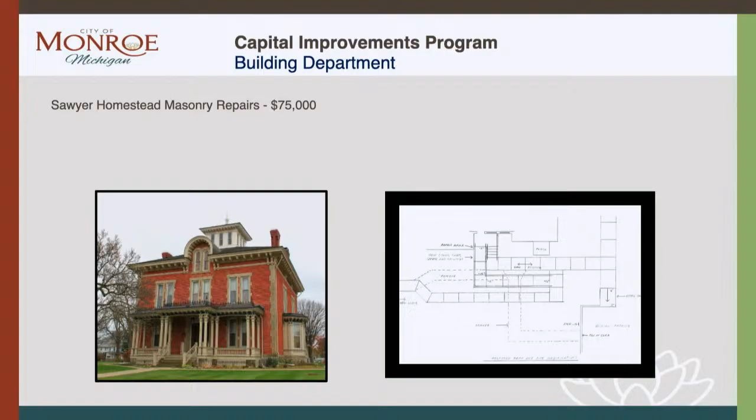That was it for the Building Division. So the next is the Department of Clerk Treasurer, and I know Clerk Treasurer Lavoie is here this evening.

Clerk Treasurer Lavoie submitted one item this year for consideration, and that's $119,000 to upgrade voter assist terminals and tabulators. There are several reasons for this, the most important being that the state of Michigan is going to require municipalities that host elections to upgrade their equipment by 2029. This is an effort to get ahead of those enhancements. These machines would be in compliance with the intended upgrades required for 2029.

I'm sure that Clerk Treasurer Lavoie will be happy to answer any questions if there are any from the Planning Commission.

Getting back into the rest of the Economic and Community Development Department, we will start with the Economic Development Division, and in particular on this one, the Downtown Development Authority.

One of the asks that we will have is for an upgrade to the downtown Monroe brick kiosk. There are a number of people who have looked to hang posters and things in the existing brick section, and we are looking to upgrade to an interchangeable electronic kiosk - very easy to update, also interactive for folks that are visiting. The company that we received a quote from installed one at the River Raisin National Battlefield Park, where you can go and interact with it currently. But this would be a first, and potentially looking at some other locations in the future.

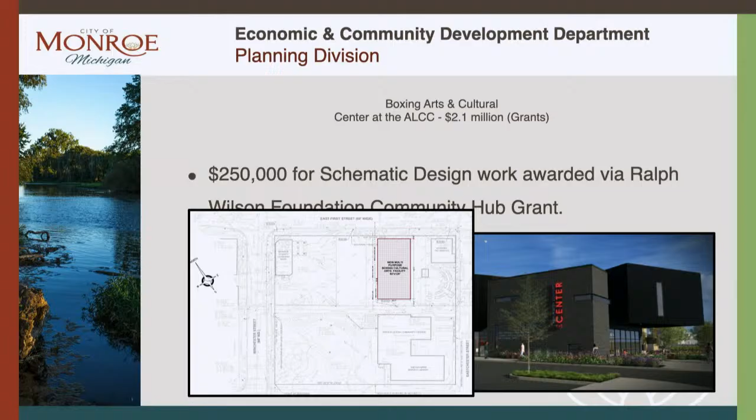Next is a project in partnership with the communications department, an update to the city's wayfinding signage. The goal will be to bring outdated signage into alignment with the updated parks and gateway signage that should be going in the early part of 2026.

We're proposing to fund this over the course of 2 years through the Major Street Fund, looking at key areas and doing a full analysis of where these signs are currently located, a full inventory, and seeing if we're missing locations or need additional upgrades, bringing everything into alignment with the updated city branding.

We talk about this all the time, but it's the small things like coordinating colors and branding and signage that go such a long way toward the community having pride in itself.

The next project is the funding of construction design documents for the Orchard Greenway Trail. This project has already been initiated through the 25-26 fiscal year, thanks to a regional planning grant provided by SEMCOG of $40,000, matched locally by $10,000 from the city. The total estimated project cost will be in the area of $2.5 million and will be a multi-year project involving property acquisition and construction.

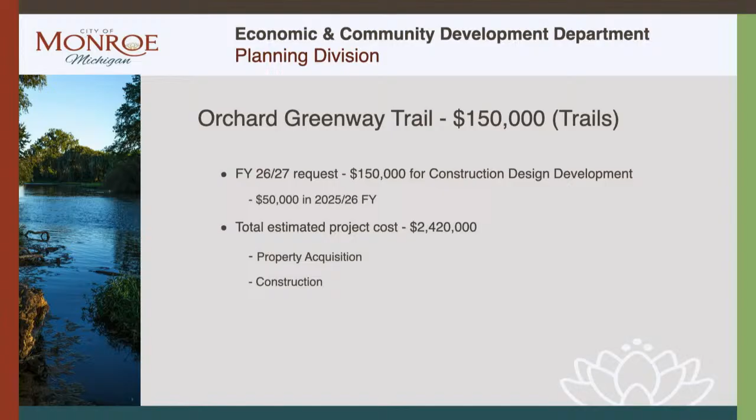Now kicking off the Parks and Recreation Division with the number one priority project for the department, which is phase 2 of the St. Mary's Park project. Planning to use the funding breakdown shown to complete phase 2, which will provide updated court surfaces, additional accessible trailways and viewing terraces, and an updated playscape facility.

This will go hand in hand with the parking lot upgrade that was just completed. You'll see landscaping starting to go in, if it's not already completed, at the park. There will also be some additional furniture included in some of those terraces. But that's all phase 1, and this would be phase 2 of the project.

We are in the final stages of waiting to hear back on a $400,000 grant from the DNR that would go a long way toward achieving the end goal of $1.6 million for the project. We would look to fund the rest through the remaining phase 1 and 2 grant from the MEDC, plus just over $1 million from the general fund and $200,000 from the roads and trails millage.

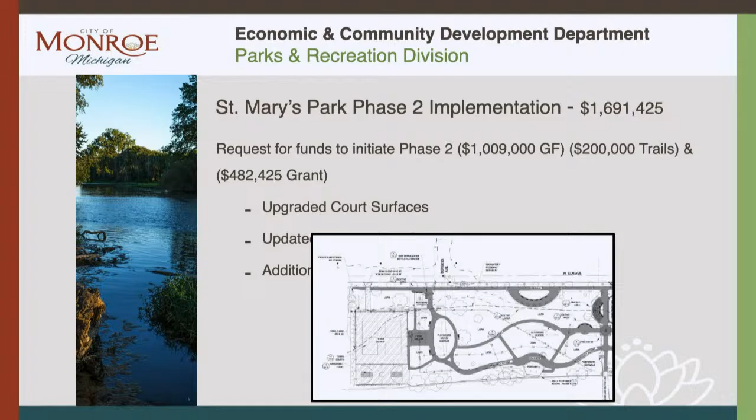A few additional park projects to highlight include an annual allocation to create an accessible pathway to the nature trails in Munson Park, and fund a much needed light repair to our Munson Park ball fields and diamonds.

In about 2016, there was a fix made to do almost a temporary patching of the court that's now starting to show its age, and it's going to warrant a full repair. So that's a $220,000 ask as part of the CIP. It's one of those critical needs that were identified.

To close out the Economic and Community Development Department, a couple of smaller projects. The first is an annual $10,000 set aside for parks and sidewalk maintenance. Last year there was a section in Soldiers and Sailors Park that we were able to utilize some of these funds for, after it was funded in the previous CIP year. Every once in a while there are smaller sidewalk sections that start to deteriorate, or may not even exist yet, but may represent a need for some of those things.

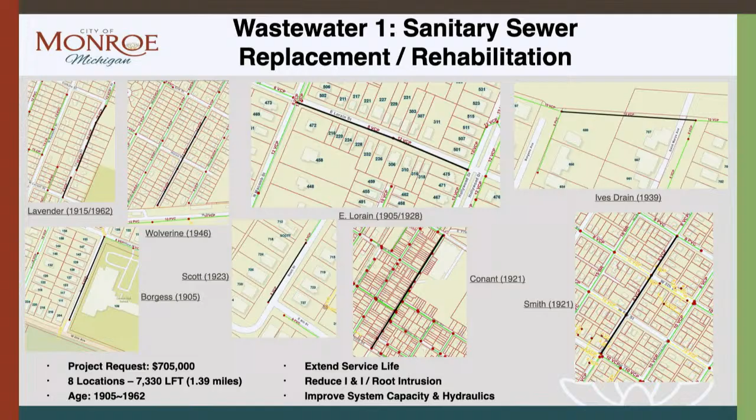Second ranked project is our backup level controller system at our settled waste system at the wastewater plant. This is a well that moves material from one treatment process to the next, with a system for controlling the level of fluid in there. When that goes down, it gets a little chaotic in emergencies, so we're proposing to have a backup controller system ready and available. That request is $100,000, and it'll help us with maintaining operation.

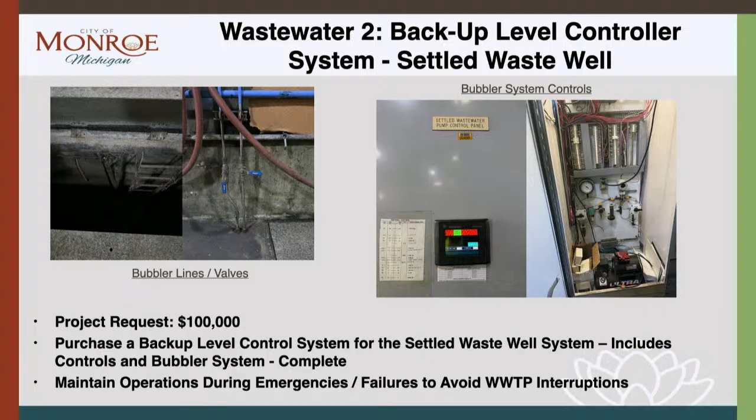Third ranked project is our wastewater lab upgrades. It's broken into 3 phases. The $195,000 breaks down as: we have an autoclave we have to replace that's used for sterilizing all the glassware we use every day. We have some antiquated cabinets and countertops we'd like to replace, and then construct a small partition to do more administrative work for our staff. The last phase is putting in a mini split to balance the heating and cooling in that area.

Now moving over to the water distribution division. The first project is our water distribution replacement, with 5 different projects located there, about 0.66 miles, about $1.329 million. The oldest is from 1912. These are again coordinated with road projects, and the main break metrics are listed there, but those records only go back to about 1983, so we know they're probably worse than that. There are 17 lead and galvanized lines that will be replaced in those areas. The Telegraph Road project, I believe they're supposed to be paving that next year, so we'd like to get that replaced before that. We've had several main breaks in that area.

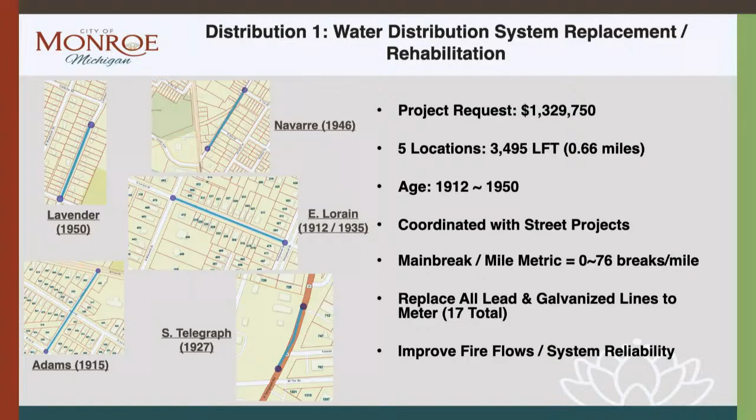The second ranked water distribution division project is the meter shop improvements. It's broken into 2 phases. The roof replacements for the meter shop and equipment building are flat roofs with about a 20-year life. We're starting to have some leaks and we'd like to replace those. That was constructed in the 2006 addition and rehab at that facility.

The other improvements are geared towards this inventory barn. We've got about $2 million of inventory in there, so we'd like to maintain it. It definitely needs some rehab on the exterior, and some concrete floor repairs and drainage.

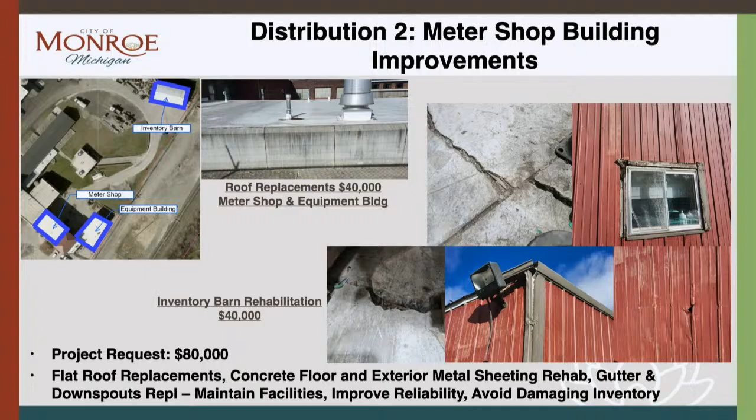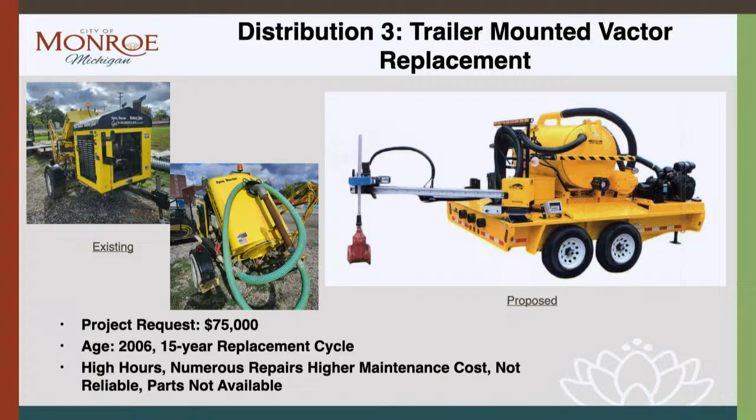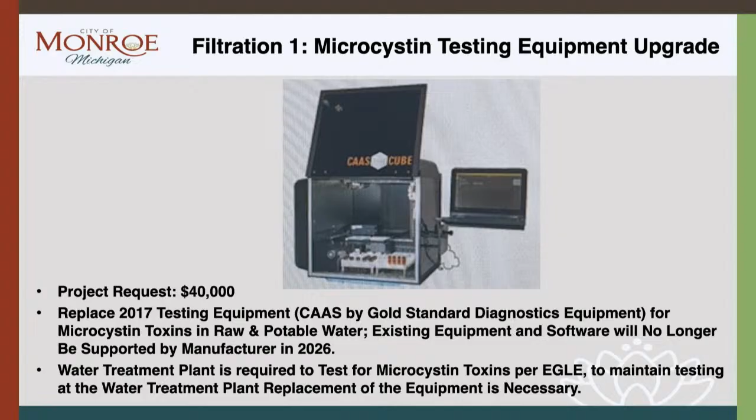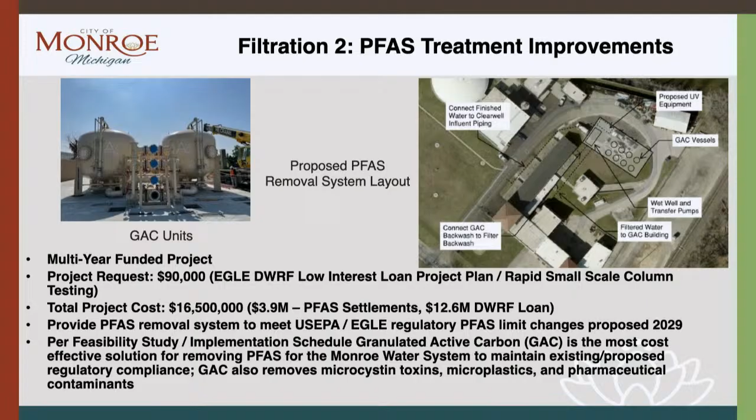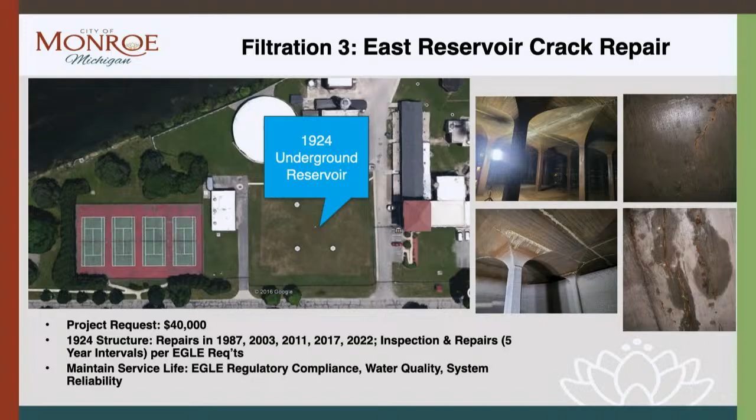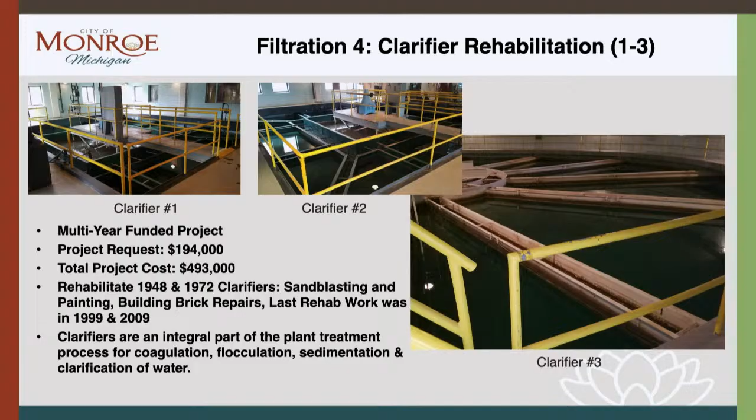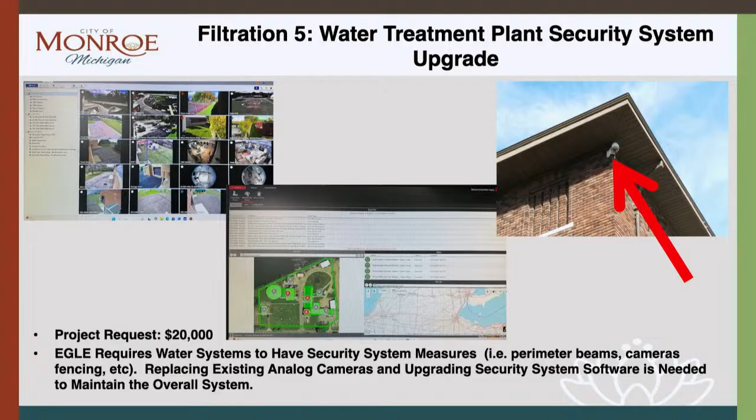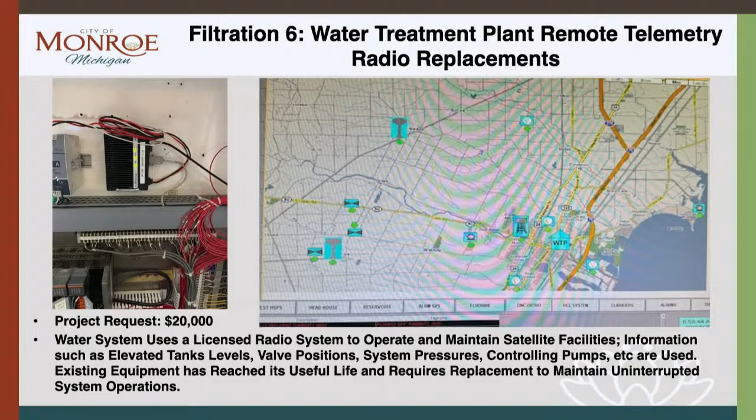The seventh ranked project is a pump motor drive rehabilitation project, a multi-year funded project. The request is to help contribute funds to continue replacing - we have to pull these pumps out of service, inspect them, and have them evaluated. It can literally take over a year to get them back from the vendor and installed, so it takes a long time and a lot of funds to complete this process. But maintaining the facility's integrity to transfer water is paramount, so this is geared towards the high service pumps at the water plant.

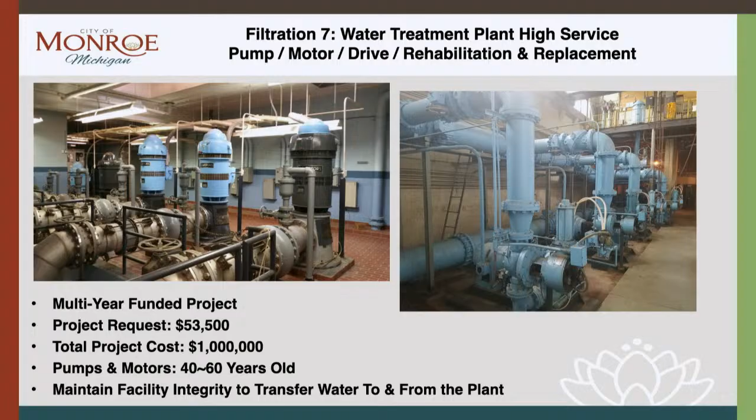The next ranked project is our main power system rehabilitation and replacement at the water plant. It's a multi-year funded project geared towards addressing system maintenance, repairs, and replacement of breakers, transformers, and the switchgear of the main power coming into the plant. So this will be seed money towards starting that process.

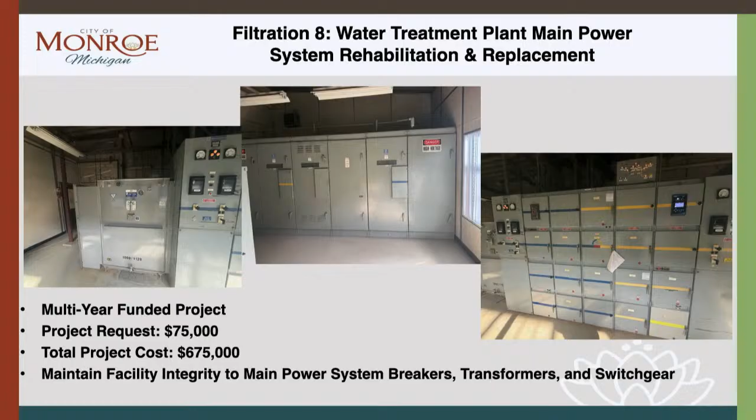And the last ranked project in the filtration division is our filter rehabilitation for all the filters, there's 12 of them. Different years that they were all built: 1924 with the original plant, 1948, and 72. This is a multi-year funded project that will address concrete work on the outside, roofs, some regulatory improvements that were outlined in a study we had to complete, and media replacement.

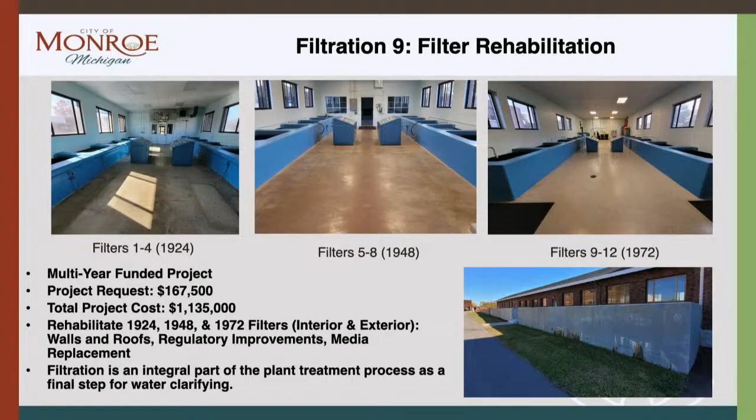Now moving over to the raw water partnership. The first ranked project is a roof replacement. This $25,000 request will be added to last year's request to do one large project to replace these roof systems that last about 15 years. It's a flat roof, these are all flat roofs. So this would just be replacing the roof systems that are there to maintain system reliability, avoid leaks on the equipment and things. The funding is per our agreement with Frenchtown, based on capacity. It's about 69% city and the balance is with Frenchtown.

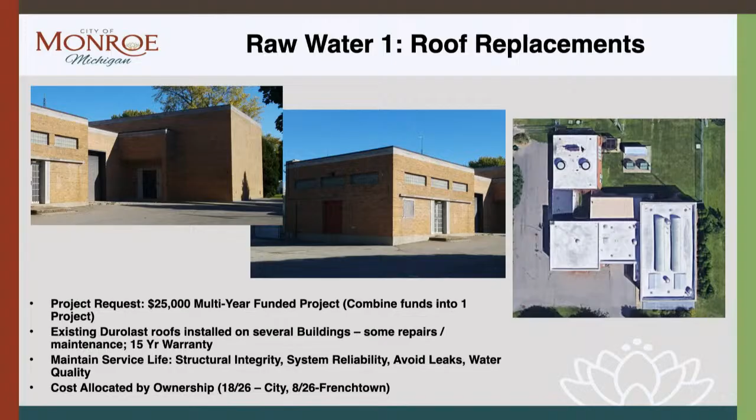Next slide. The second ranked project is the pump rehab, motor and drive for these low service pumps. These draw water from the 4 onshore wet wells and pump it to both the city water plant and Frenchtown's water plant. It's a multi-year funded project, and some of these components are 30 to 80 years old. So rehabilitating these every 20 to 30 years is mandatory. The whole goal is to maintain the integrity of the facility, and the costs are still based on ownership percentage.

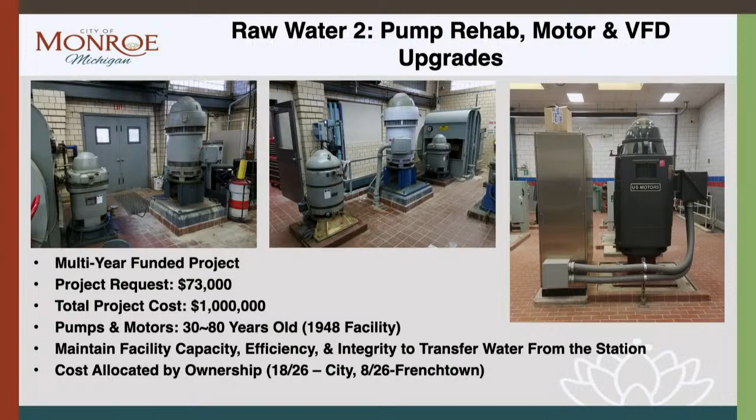Third ranked project is replacing our chemical feed line. There's 2 intakes, a 42 and a 30. Inside those, there's a 2-inch line that runs all the way out to the intake structures, 6,000 feet offshore, and the other one's about 2,000 feet. These need to be replaced every 20 years or so. These feed chemicals to help remove invasive species that build up and can clog our intakes. We experienced that in 1989, in which we had no water coming in. So this is mandatory to help us with maintaining water coming into these facilities. Cost is the same by percentage for the city and Frenchtown.

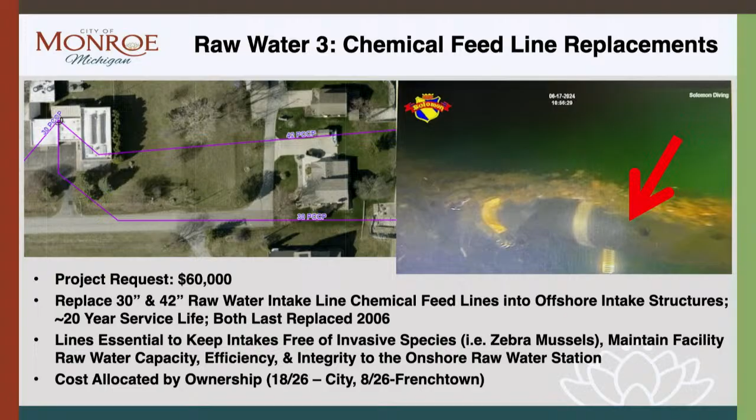And the last ranked project is the addition of the raw water pump. This is a multi-year funded project, you've probably seen this on here before. The whole goal of this project is to add a second large pump that would be in the newer facility, the newer portion of the facility. There's 4 wet wells, we have pumps in 3 of them. This would be put into the last one, and it would help contribute to maintaining our firm capacity of 18 million gallons a day. So, and that is it.

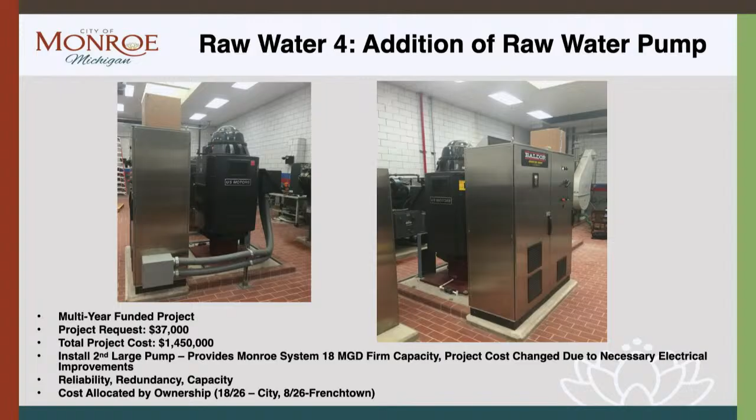Good evening, Planning Commissioners and City Council members and others in the audience. Patrick Lewis, Director of Engineering and Public Services.

So we do have 10 different streets funded this year, about $3.9 million for this year's CIP. 8 of those are what I'd call bona fide streets, and 2 of them are either the design for Greenwood or the mast arm upgrade project.

So you've heard the spiel before, those of you that have been around. The way we look at streets is that the superintendent of public services, the assistant city engineer, and I drive every block of street every year in August and September. We give it a subjective rating, 0 through 10 on the street surface, 0 through 4 on the curb conditions, add a point for a major street, and then we combine those into similar blocks. And that's how we start to look at the list.

We start to sort those when they get to about a 7 rating, and start to consider those for funding. There's a variety of factors why they rise to the top—it's not always going to be the largest number, but we'll get into that in a minute. Some of the other things we look at, which aren't too surprising, it's not always worst first.

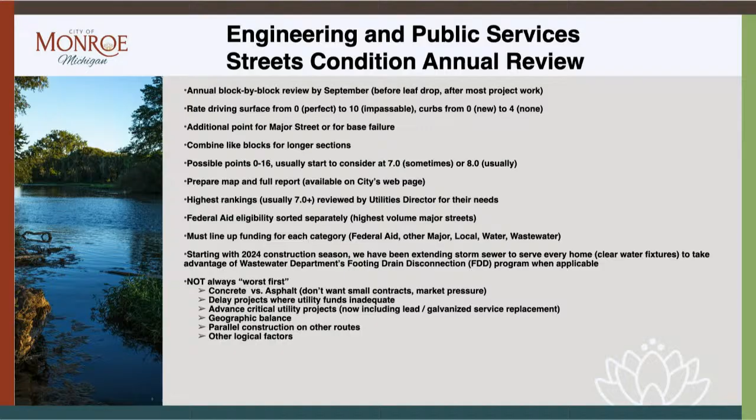Our first priority was Lavender Street reconstruction. I made it our first priority because we had delayed it a year from where it should have been, just because we were working on Rosler Street last year, one block over. This is an asphalt road done in 1996 last. The curbs were in somewhat decent shape, but once we started costing it out, we realized it was going to cost more money to try to save some of the curbs and work around them than to just tear it all out.

So this will be a full curb replacement project, and we're going to do this in 8-inch concrete. We do have a new storm sewer down the middle of the road because there is none, and in that neighborhood we have quite a few sump pumps connected to the sanitary. So that deals with Barry's corrective action plan, which requires us to remove those clear water discharges - that's a focus area of what they call the CAP plan. We're replacing the water main in this location as well, so we're going to combine that in one bid package with water mains and streets here. So you can go on to the next one.

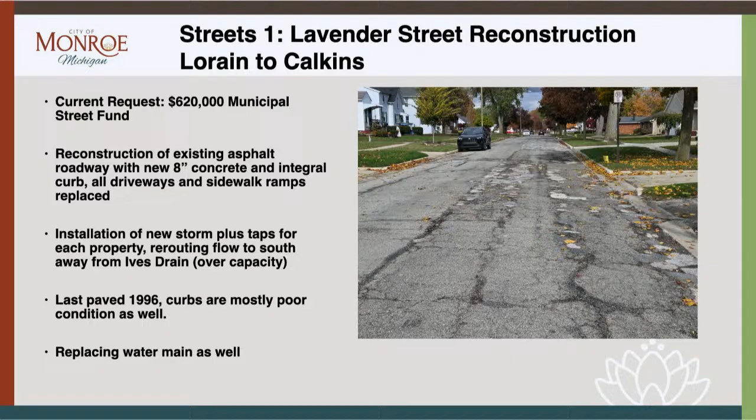Navarre Street is our second priority, and we held this one a year, partly because we're looking at this year's federal project in 2026, which we already allocated funds for last year, the Jones Avenue reconstruction and realignment project. We got a $646,000 TAP grant to add bike lanes and sidewalks, which actually covered the cost of the curbs too. Because the Jones Avenue project will realign things so LaPlaisance coming from the south automatically curves into Jones and the north leg is teed off, that will keep truck traffic from going all the way into town. Because of that realignment, Navarre Street will be affected a little bit, so we held it until this year even though it would have made the cut last year.

This request is $540,000 from the Municipal Street Fund, and this is a concrete roadway - it will be replaced in concrete. We're replacing the water main here as well. Fortunately we already have a storm sewer here, so we just need to put the leads into the adjacent homes. The trick here is going to be working around the sidewalks - we have a very narrow right-of-way, so that sidewalk is right at the back of curb. When built, those ramps going down to the driveways didn't always meet the ADA cross slope, so we're trying to focus on putting one accessible path down there.

It might involve crossing the road a couple of times where we don't have as many driveways, so this is a bit of a design challenge, but we are looking to do this year. If the Jones Avenue project bids this year but won't be done until 2027, we'll probably delay this too, but we want to fund it this year and get it designed.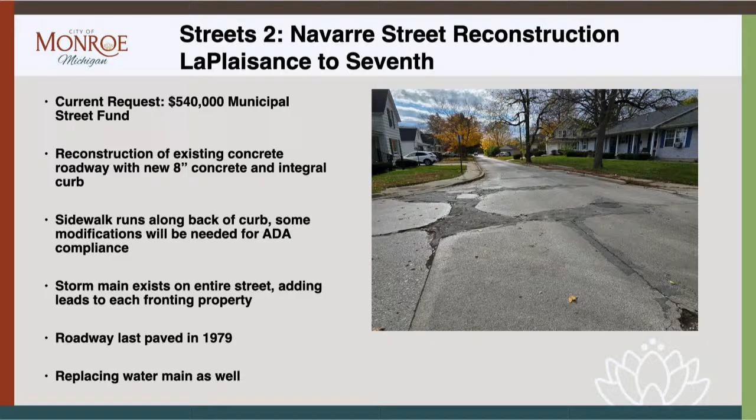So we are replacing the water main in this location also. You can go to the next one. Our third priority project, where we are not replacing the water main because that was done in the 90s, is Michigan Avenue from Mason Run Drain to Greenwood. It's another project with an asphalt surface.

We looked at this to try to save the curbs. I had a couple of job shadowers come with me on this one, and I was impressed by their ability to perceive. We all marked the curbs and identified what percentage we'd have come out, and a couple of high school sophomores came up with the same answer I did, which was pretty cool. When we looked at this, we found about 50% of curbs needed to come out. It's less efficient to leave in some curbs and try to keep them than to just tear it all out, because the contractor can move a lot quicker that way.

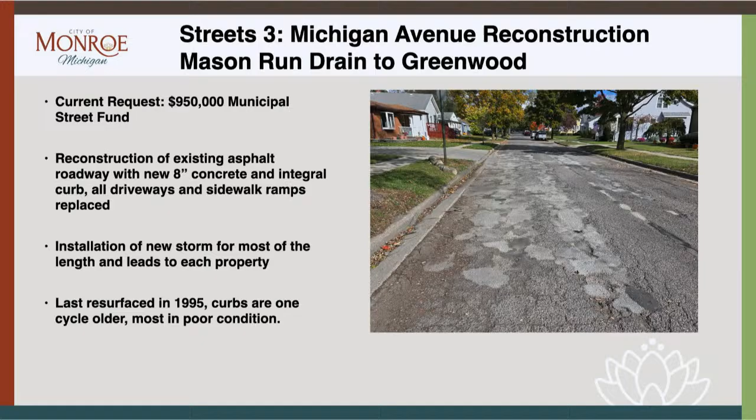There is some storm sewer in this area, not complete, so we're filling in the gaps and adding leads to each of the properties. This is a pretty long project, almost half a mile, but with all the storm sewers and leads involved, you're talking about a $950,000 expense. We are surveying from Greenwood going north to do in 2027 - that'll be a water project - but for this section from Mason Run to Greenwood, it'll just be street and storm sewer.

Project number 4 is another synergistic project to some degree. We picked this block because we're working on the loop trail extension - we'll come up with a better name for it - extending the loop trail from 5th and Rosler all the way through the Bechtrom Foods property up to Front Street. But we're crossing Adams, and we don't want the new trail crossing a road that looks like this, so we moved this up a year.

This probably would have waited another year or two, but we are reconstructing both the block between 3rd and 4th, which is currently concrete, and the block between 3rd and Front, which is asphalt. We're doing both in concrete as well, and we have water main to replace on both. A little bit of storm sewer, some at the corners. Between the two blocks it'll be a $360,000 expense, and as you can see, the last resurfacing or reconstruction on these was in the 1960s, so we're not redoing new roads here.

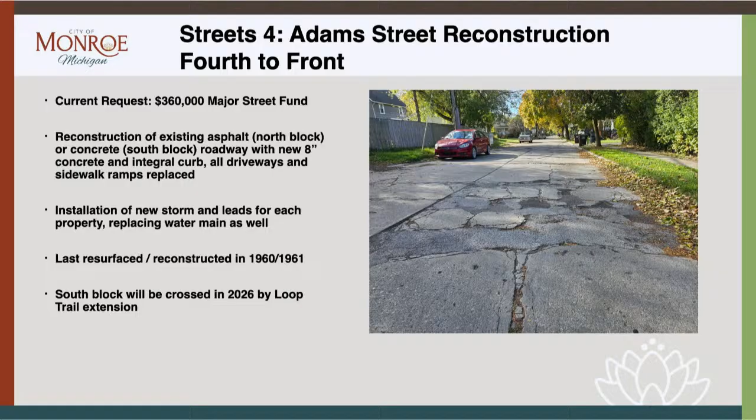Project number 5 - I mentioned there was one where the tail's wagging the dog, if you will. This is it: Barry has had a ton of main breaks on this section, East Lorain Street between Macomb and Hollywood. This is the worst part of the road. Most of the road is in serviceable condition, although it's 40 years old, but we can't wait any longer on the water main replacement. We've replaced the same person's drive approach at least 4 times, twice this year - that gives you an idea of how bad it is.

So this is one where we're moving up the street to meet the most appropriate timeline. But this is another instance where we have no storm sewer on the entire block, so for 800 feet we need to install a storm run and some taps. But this is one where we can get away with just milling and resurfacing, without taking all the curbs out. So the cost on this one is a little less, $350,000.

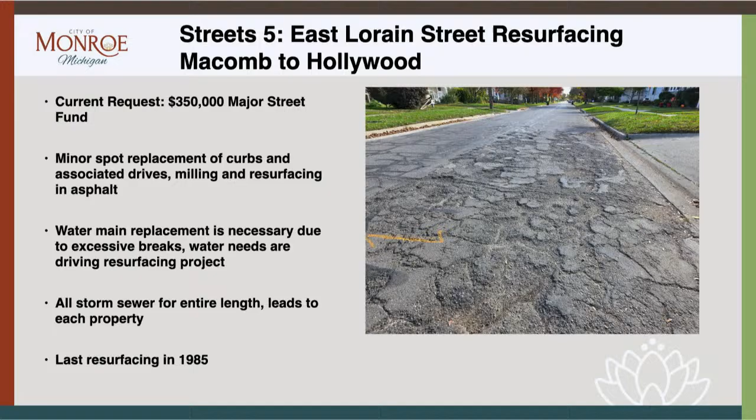Project number 6 is our Fredericks Drive, and 6 and 7 are both what I'd call big patch projects. Fredericks looks a lot like this, from Donnalee all the way to Telegraph - you've got pieces where it's just brutally bad, and then you've got some good panels in between.

So we're going to be doing about a third of the panels here in that stretch, but it's going to resemble a full reconstruction when it's done, in that it's going to be in pretty good shape. It was constructed in the 80s and really hasn't had anything done since, so it's in pretty good shape other than fixing those patches. We're going to do a short section of Crest Lane while we're at it as well.

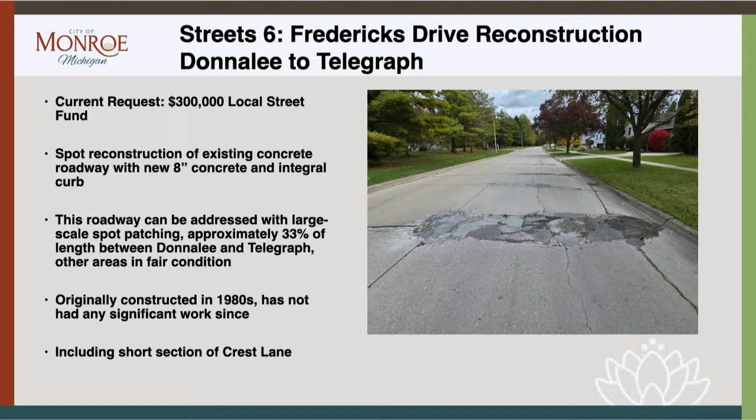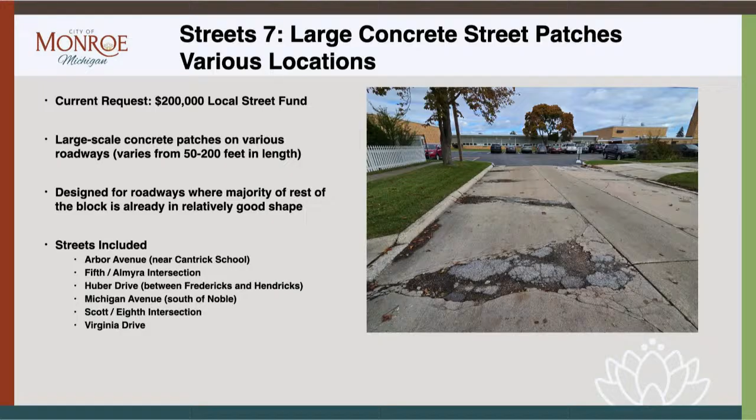I mentioned some spot patches. We're trying to go through our inventory and say, where can we do $20,000 to $50,000 worth of work and make the rest of that street in really good shape for the next 10 to 20 years? So we picked a number of locations. We did this last year, we think it worked out really well, so we're going to do another run of these. We've got 6 locations. The largest of those is in view here, and that's the block of Arbor between Maywood and Cantrick School.

Streets number 8 is one that we're kind of stuck in a holding pattern on to some degree, but we had to deal with it now. I think I've mentioned in past years, we're looking at a comprehensive storm sewer project in what's affectionately known as the W Street neighborhood, which everyone knows was built in the 50s. Eaton Tile is drastically undersized. It is a county drain, and we're going through the process right now of looking at options, with the Spicer Group assisting us with that. We're getting close to having the final report in, but we're at least 2 to 3 years away from construction of that large diameter tile and whatever system we put into place, and that'll be an expensive project done through the Drain Commissioner's office.

However, Wolverine Avenue is a complete mess. The north block looks like this, it's in very poor condition. We can't allow this to continue too much longer, so we have funded what I'm calling a temporary resurfacing. There may be elements that are quasi-permanent. The very north end, we may have to put down a concrete pavement for 100 to 150 feet just because it's gotten so bad. But we're looking at doing no curbs, no drive approaches, 1.5 inch mill and fill, and just hold it in place for hopefully between 5 and however many years we can get that project done. So we don't generally like to spend good money after bad, but we can't wait any longer. So that's what that is.

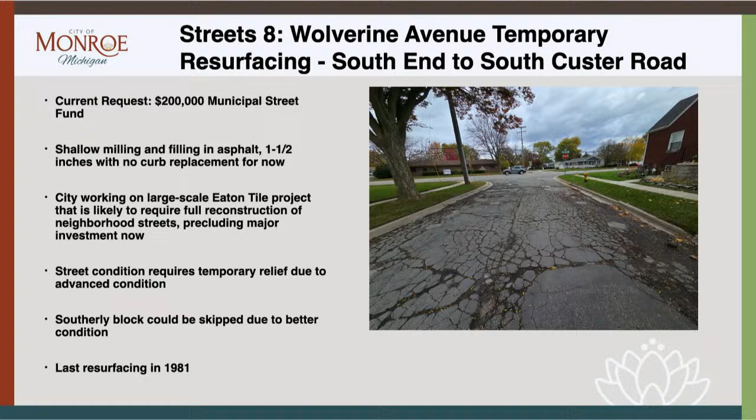Streets number 9 is something the council sort of already committed to because we were asked to from MDOT. We've been partnering with them as they've been upgrading their traffic signals along their trunk lines to meet the Telegraph Road corridor study, which calls for a higher aesthetic standard. We're getting close to having all the telegraph signals done with this. You've already seen these at South Custer and Telegraph, and at 7th and Telegraph. And then we did the work ourselves as part of the La-Z-Boy project to do the same thing at Holiday and Telegraph. So they're looking at Lorain and Telegraph this year, and M125 Monroe Street and Noble. Elm Monroe also has the mast arm treatment on it. So they've asked us to pay the upgrade costs.

Originally, a few years ago, pre-COVID inflation, they were looking at about $80,000 per intersection. Now we're about double that. I think the quote was $286,000. I've requested $300 here to cover the time frame between now and when they actually get ready to do it. So that's consistent, we like it, we love the look, it's safer. They're on the far side of the intersection, so we don't have to worry about signal knockdowns. These poles are pretty robust.

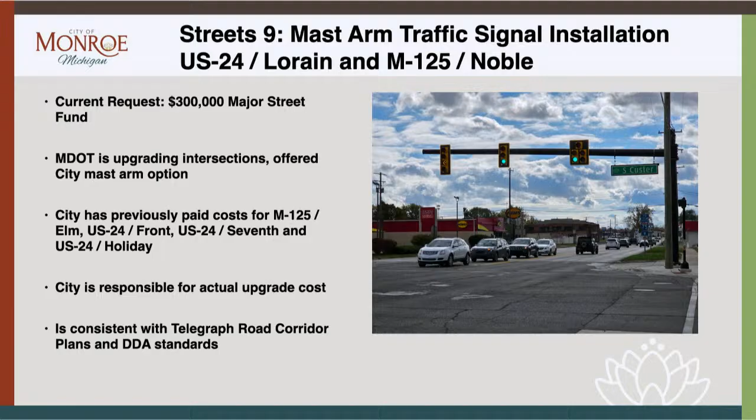And project number 10 is one that I've kind of had in the back of my mind for quite a while here. Actually, we started looking at this part of this project close to 20 years ago, and that is a reconstruction of Greenwood, which is starting to get in poor enough condition that we need to look at it. But more importantly, I'll say a reimagining of this corridor. Greenwood Avenue was designed, if you can believe it, back in the 50s. The reason it's 36 feet wide is actually identified as part of a potential I-75 business route. When they built the expressway, they were looking to connect a business loop there, and this was one of the streets that they looked at. It was built overly wide.

It dead ends west of Hollywood, and east of Michigan into the Greenwood townhomes. But it is something that could very easily be extended to the east for future housing development. So we wanted to take a look at this.

Going west, the city actually owns the property all the way to Macomb Street. It could be extended to provide a better route into that neighborhood. Right now, everyone uses Orchard, Oakwood, and Maywood, but they're quite a ways apart.

We could also narrow this road up. So when it comes time to reconstruct it, 36 feet is too wide. There's no homes that front just Greenwood, they front all the north-south streets. You could probably get away with a 28-foot corridor here, using the rest of that for a non-motorized pathway along the drain.

So we would like to request $100,000 in funding for the design of not only the extension to Macomb Street, but to reinvent this corridor, and then probably do the work in 2027.

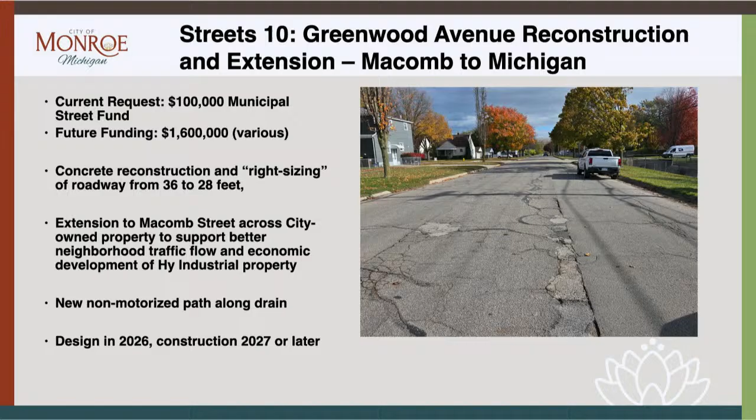So I'm pretty excited about this one. It's our number 10 priority only because it's not construction this year, but I'm really excited about this one. Okay, on to infrastructure.

I'll keep it shorter on the infrastructure ones. Our number one was our sidewalk replacement program. This is pretty routine, you know what we do on this one.

I will say our complaints are getting higher and higher every year, and some of that is because with the passage of the streets and trails millage, the city's now paying all the costs. We used to assess the general deterioration to the property owner. So it turns into a situation where before, when the residents were paying, they were arguing that it wasn't an inch. Now that the city's paying, they're arguing the other way.

So we're actually seeing the cost go up, and that's good because it means we're identifying more hazards. But to get just the program area done is about 150, and we're dealing with 100 to 150 just in complaints. So we've upped that cost from $250,000 to $300,000 this year. And this year's target area would be north of the river and east of Maple.

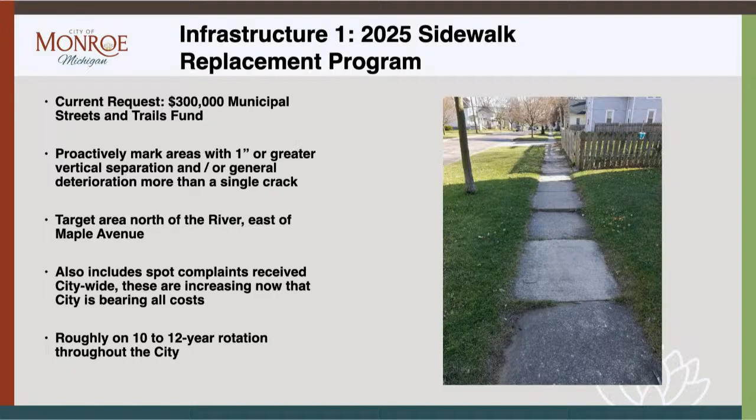So, go on to the next one. This is infrastructure number 2, a project that came up with the County Road Commission telling me they had a number of bridge projects planned for 2027, and if I had any bridge projects, we might want to look at bundling them with the Road Commission.

So we actually moved this one up a couple of years in the schedule for two reasons. One is that we think we can do better if we bundle those with the Road Commission, and it's a federally eligible roadway. And two, we're looking at that big number of $34 million in the 2028-29 fiscal year, which includes the West Elm Underpass year.

So we're hoping that it gets built in 2028. We're trying to get this Roessler Street deck resurfaced in 2027 because we know there'll be a lot of traffic detoured onto this, so we're hoping we can get it done in time.

There may be some flexibility in the 2009 bridge millage that could offset some of the costs here. We would be borrowing the 2028 federal aid dollars to move them up to 2027 to get this project done, and the Road Commission says we can swap funds with them, so we'll take their 2027 funds and pay it back in 2028.

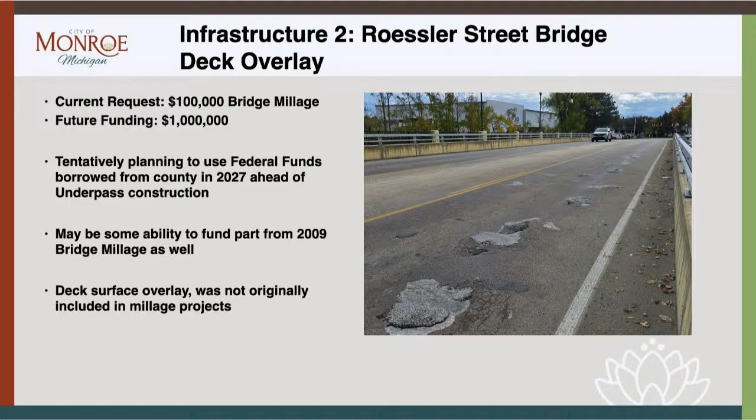We had funded in here—oh, yeah, I'm sorry, this did not get funded. I thought I had taken it out. That's my bad. We requested funding to replace the parking lot at Sawyer House, but I didn't quite make the list.

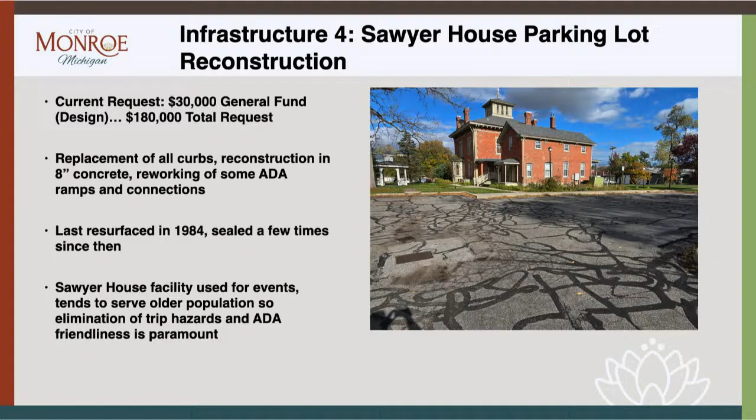Number 5 is the city employee parking lot fencing. This was intended to be funded with the employee parking lot that was done in 2024.

The costs for that were above what we had funded in order to get both the fencing and the columns in. Our zoning ordinance requires us to put perimeter screening. The example on the upper photo is what the county parking lot at the northwest corner of First and Macomb looks like. We'd be looking at something similar for the employee lot. Photo on the bottom shows what the employee lot frontage looks like along First Street. It would be on the First, Scott, and Second Street perimeters where the fencing would go.

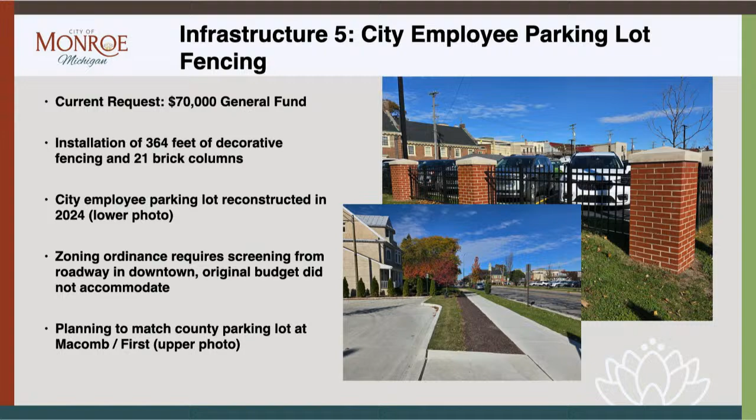That's a $70,000 expense, and it's already designed with 364 feet of fencing and 21 brick columns. Infrastructure number 6, we're continuing the initiative started in 2012 to pave portions of the DPS parking lot.

That site was completely unpaved 12 years ago, dragging a lot of mud through it, a lot of house cleaning things. We've got the west side, which is mostly the public-facing side, already done. We would like to go another $80,000 worth to come around the south end of the building. We still get citizen traffic through there during leaf bag season, and we have dumpster collection, things like that. So we'd like to slowly continue to get the site paved, just another iteration of that.

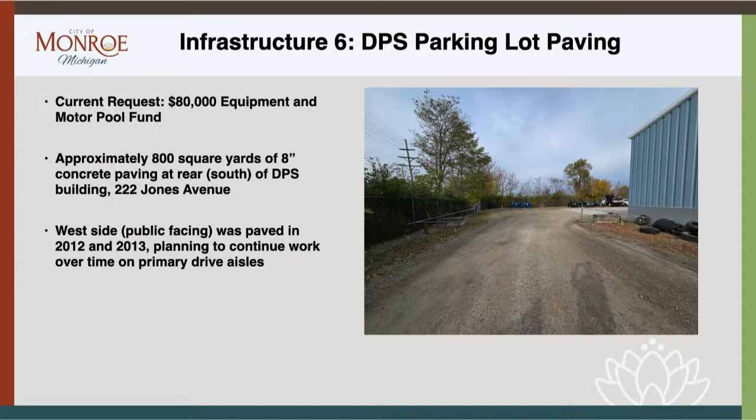Then we get to our equipment. We had 2 loaders, both 2003 models, and we replaced one this year. This will be the second replacement, so $290,000, funded through our equipment and motor pool fund, which basically charges the major and local street funds or refuse fund. When work is done, we bill an hourly rate to those funds, but the equipment and motor pool fund actually owns these. We need a trailer.

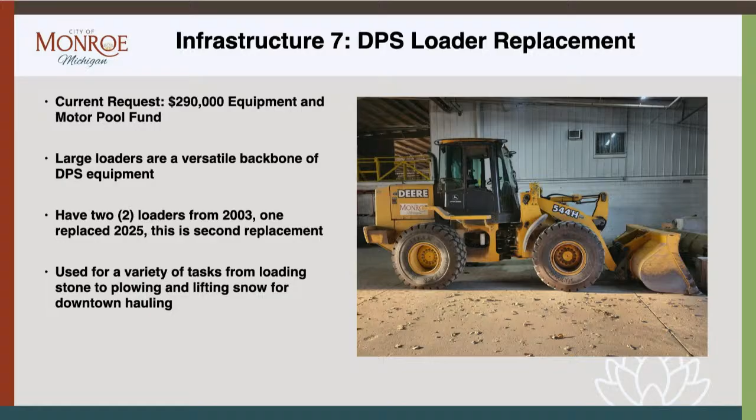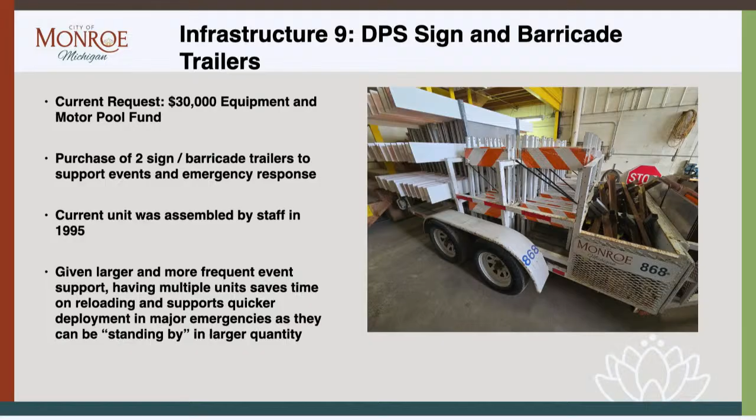With the festivals we're starting to have in the broader service area, we could use two units so we can keep them both loaded up. It would save us a ton of time during events if we can have them both loaded up and haul them both to the site at the same time. So we've got 2 of those trailers.

And we've got a couple of furnaces. Most of the bays are heated with large overhead units, but we do have a couple of, I don't want to call them office areas, but they kind of are. Our forestry department has an individual furnace, as does our sign shop, which is on the 2nd floor, and those are walled enclosed spaces. Those are both 20-year-old furnaces, getting close to their last legs, so we've got $25,000 we think will replace both of those.

Long-range projects, I won't bore you with all of what we've got there. There's some stats for what we're showing in our future projects list. Streets are streets; we just keep changing the order every year, again looking at the utility needs, and what's first on next year's list may not appear the year after. But we're looking at over $20 million over 5 years, more than $4 million a year, and that's keeping up with what we get in from the major local street funds and our street millage. We think we're in pretty good shape to start keeping up. We're starting to slowly get past the backlog we had prior to the street millage, so we feel we're in pretty good shape, and we're just continuing to chug along there.

On the other infrastructure, our biggest project is one we don't know exactly what it's going to cost. We think it's a $30 million project, but that's a big enchilada there. So we're planning to construct that in 2028, and that will, again, provided we can stay on time with the CSX Railroad, who is kind of the major impediment here in signing off on the concepts.

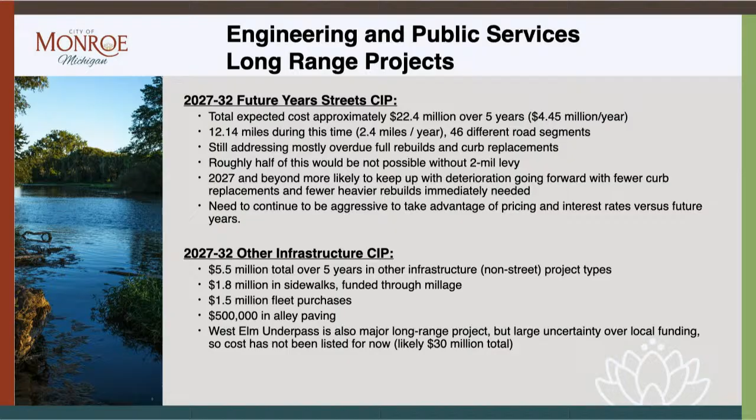But we have shown some funding for alleys in there as well. Is there anything else I'm forgetting? Probably, but I don't know if there's anything important enough that you need to hear about it tonight. So happy to answer any questions that you have when we get to that point.

So you want me to stay here? So if there's any questions from any members of the CPC on anything tonight, yes, Joel. Yes, I have one question.

The Monroe Street Bridge, the sidewalks on that are looking pretty rough. What is the future plans?

Well, you probably have to ask MDOT on that one, but that's a conversation that we're planning on having with MDOT, because they're doing the US 24 resurfacing project in 2026. They're looking at filling in some sidewalk gaps and things like that. So we're due to have a conversation about non-motorized facilities on their trunk lines, and I'm planning to bring that up at that time, because you are absolutely correct, and that is their responsibility.

We have a maintenance contract with them that we can patch, but it's difficult to patch because the distress is pretty shallow. You cold patch it and the rocks just kind of fall away, and it's not even if you do cold patch it. So it's a pretty comprehensive repair they're going to need there.

Yeah. Okay. Good question though. I'm glad you brought that up. Any other questions?